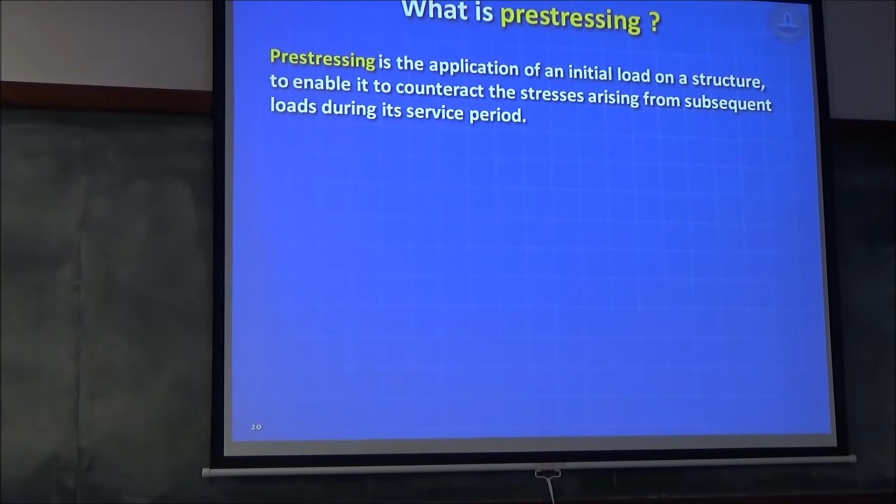So here's a very simple definition of pre-stressing. Pre-stressing is the application of an initial load on a structure or a system to enable it to counteract the stresses arising from subsequent loads during its service period, and to compensate for some deficiency in the material. As you rightly said, if concrete is weak in tension, so you can put it into pre-compression.

It's good, but sometimes we do the reverse. Sometimes materials are weak in compression and we subject it to pre-tension so that after you apply the load, you still have some residual tension left. Right? You don't want it to go into compression. Can you give an example of this?

Yeah, cycle spokes. Beautiful example. Can you explain? Spokes generally remain in tension. What's the diameter of a cycle spoke? 1.5 to 2 mm, not bad, very good.

And if you take it to the lab, and you know the length of the spoke, and you subject it to a load, what will happen to that spoke? You cannot take it, it will completely buckle. It will buckle. At what load will it buckle?

I want you to use your imagination. At what load will it buckle? You are afraid of units and all that, but I want you to give an answer. You guess the diameter, that means you're good in seeing distances, but you're not good in measuring weights. What load will make it buckle?

A 1.5 mm wire, that long. 1 kg? Let's get into structural mechanics. How do you find out? Eigen buckling load, Euler buckling load. So what's the Euler buckling load?

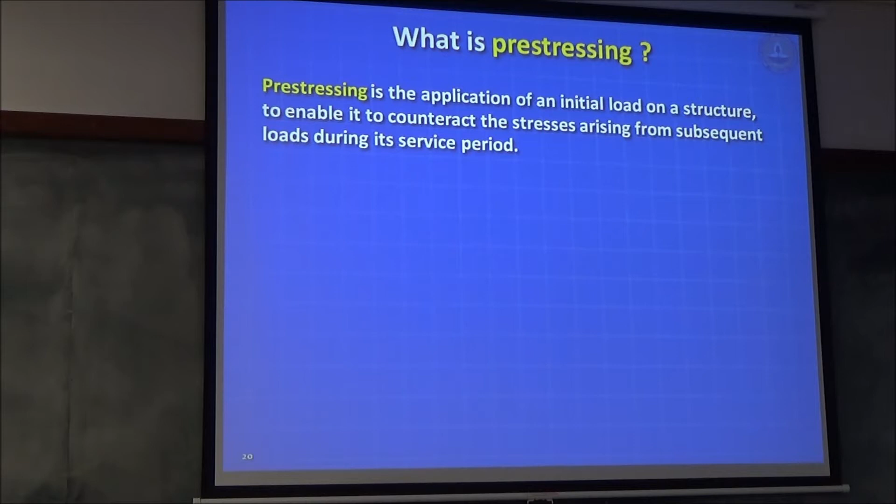Anyway, you can guess, you're putting weights and a tuck, it'll buckle. It'll buckle at a very low load. Just guess the load. Anybody? Around half a kg. Again, you go back to kg. The units of force are newtons.

Half kg force, okay? Because in his mind he already put and he knows, you've seen that half kg. Okay, that's a very low load. But in a cycle, how many people can sit on it and travel? Triples, 3-4 people, that's a heavy load. And the spoke which is touching will probably carry a large load, but it doesn't buckle. So how does the system work?

It shouldn't work, how does it work? It is so designed that all the spokes remain in a state of tension. How do you do that, practically? By tensioning all of them. How will you do it? By tightening at the center and also at the ring, and at least... Physically tell me. You only have the rim available, spokes available, you got to do it.

What's an easy way to do the job without pulling it? Do you want tension or do you want extension? These are beautiful words. By giving extension you can get tension, right? So that's probably an easier way to do it. What will you do?

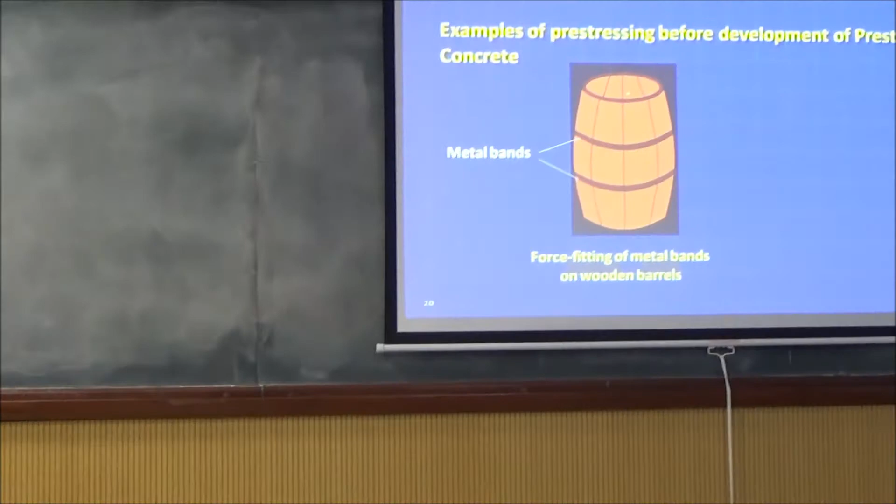So maybe there's some pictures, examples - this is the picture, very nice. You've got wooden barrels, you've got metal bands. Just tighten them, then no water will leak, no wine will leak. Simple example, right? By the way, read that book.

How many of you have heard of the French Revolution? It's one of the most powerful movements in world history, unlike any other. You have to have a taste of history - what's the use of being a structural engineer if you don't know history?

So read. What are the three famous principles that emerged from that revolution? Liberty, fraternity, equality. In French: Liberté, fraternité, égalité. Remember, these are very important principles, and many constitutions, including the Constitution of India, are based on these.

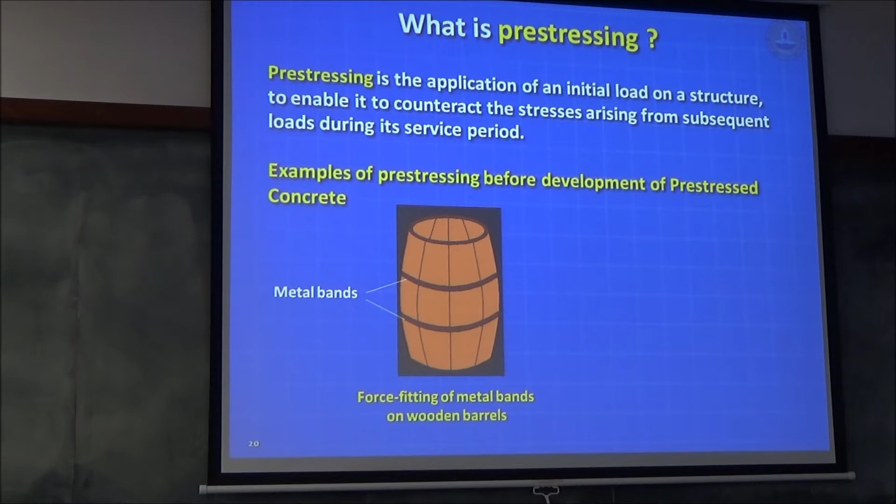The other example I just mentioned is pre-tensioning spokes in a bicycle. Now, concrete - if you read the history of concrete, we tend to give more emphasis to reinforced concrete than prestressed concrete. But historically, both started at the same time. Reinforced concrete took off faster than prestressed concrete. How old is reinforced concrete, prestressed concrete?

What's the first concrete structure ever made? 1850, there was a boat. How old is cement, I mean manufactured cement? Which century at least? 18th.

Why is it called Portland cement? There was a village in UK called Portland, and the stone there had the same greyish color as the cement. But you had pozzolanic cement way back in the Roman period, so manufactured cement came at that time. The first known application is actually a kind of ferrocement boat. Soon after that, people tried making beams. Today we don't remember that history, but it's very interesting - they realized that bond happens, that steel can take tension.

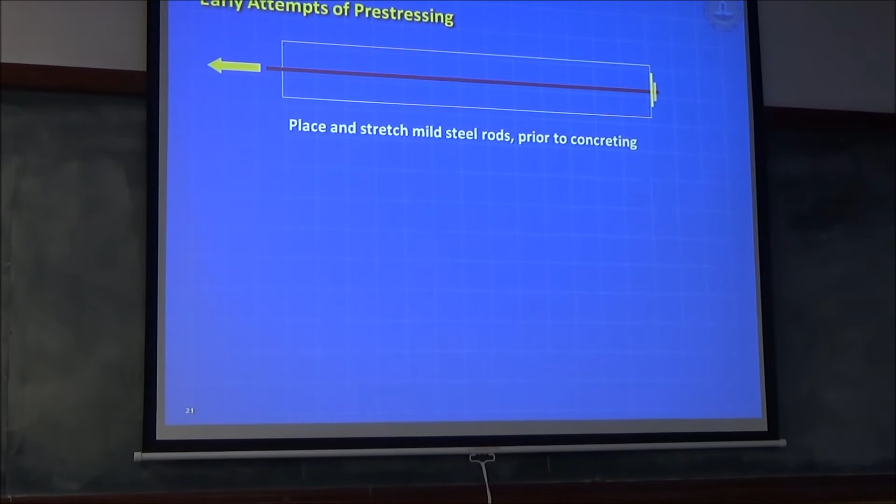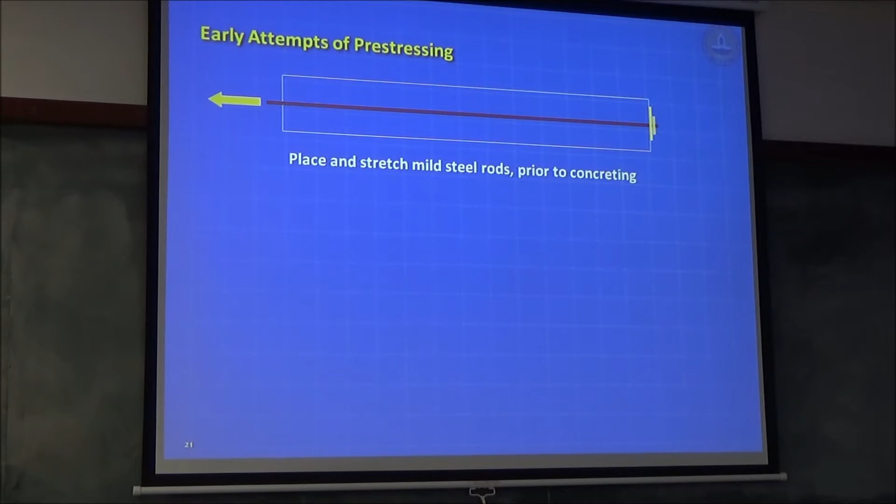They actually did what is called pre-tensioning. They pulled the bar - those days the bars available were only mild steel bars. They pulled it and then concreted the beam. It was kind of M15 concrete those days - mild steel and M15 concrete, that's all. And once cast, they put loads on it. I think the earliest loads they put were flower pots and things like that.

Then something happened - it worked. Everybody celebrated. But their celebration didn't last too long. Why?

So you release the tension - just like you pull it, you release the tension, and what happens is the bar wants to go back, shrink back to its original length, but it cannot because the concrete has hardened and it's bonded, so it ends up applying compression in the concrete. So is there an axial force in the beam? Yes or no? Yes.

If I say no also, I'm correct. There is no axial force in the beam - the beam doesn't become a column now. Why do I say that? No external load. There's no net axial force in the beam. Why? Because if I cut a section anywhere, there's no externally applied load, so there's no net force.

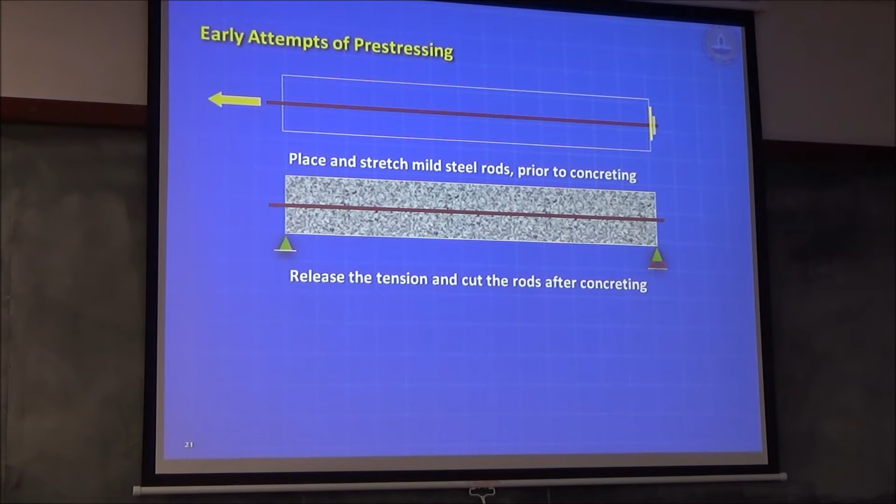But this didn't work. Although these beams could support load successfully initially, they started deflecting and cracking after some time, and eventually collapsed. This is what we call failure, and that failure was very useful to learn, because once you know a problem, once you can diagnose a problem, then you can find a solution. So why do you think this happened?

Losses. So the prestress got lost. But it didn't happen suddenly - it took a little time and it got lost. What happened?

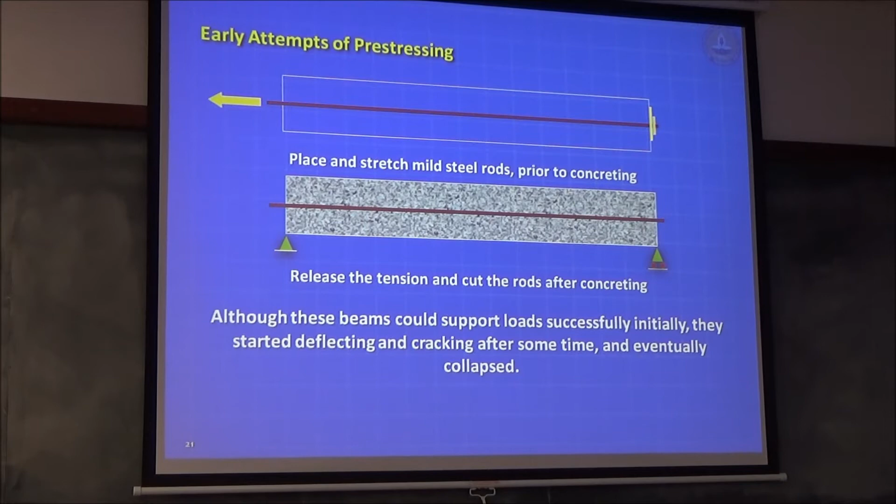Steel is relaxed? No, that's not the answer. I mean, you are remembering what kind of losses - you know that one of the losses is relaxation of steel, but that's not the reason. Want to produce some heat, can expand the steel? You have to learn civil engineering, not mechanical.

Mild steel will yield at a low level. Obviously, then this prestressing operation would have been unsuccessful, because the guy pulling it would be going on infinitely. You have to be careful - you should prestress it with some margin within the elastic limit.

Otherwise you lose it. Maybe you can go up to the elastic limit and then only release it, because you lose something from what is called elastic shortening, as the concrete gets compressed. Remember yesterday we said EA by L, because A is the net area of the concrete. That happens and you lose a little bit there itself.

That's called immediate loss. But there is something that's happening over time - molecules of the mild steel are trying to de-stress themselves and they will try to elongate, trying to take out the stress. Two words: creep and shrinkage.

What is creep? I'm a layman - I've heard this word creep, it gives me a shiver when I hear creep, creepy guy. Don't tell me 'strain on' and all that - what is creep in any material? Time-dependent accumulation of strain under a constant load.

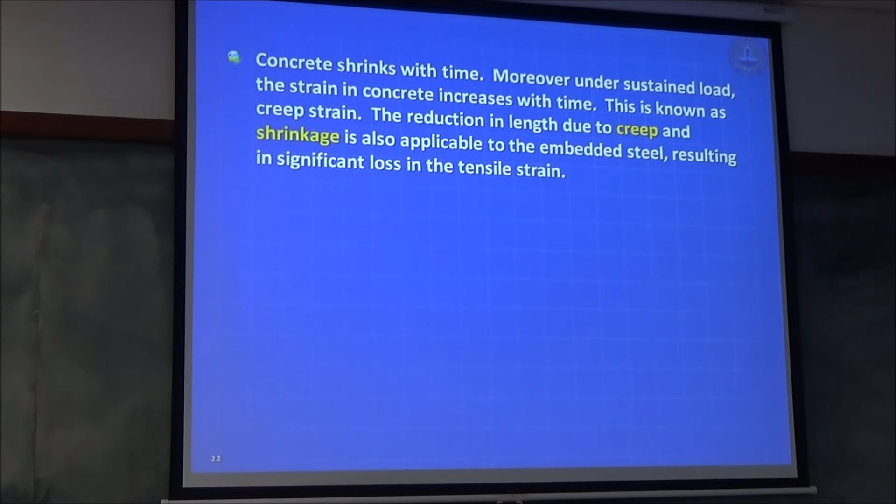Moreover, under sustained load, the strain in concrete increases with time. This is known as creep strain. The reduction in length due to creep and shrinkage is also applicable to the embedded steel, resulting in significant loss in the tensile strain.

In the early applications, the strength of the mild steel and the strain during prestressing were low or less. The residual strain, and hence the residual prestress, was only about 10% of the initial value. You understand? 100%, and then what you are left with is 10. 10 is very little to take any load. This is approximate.

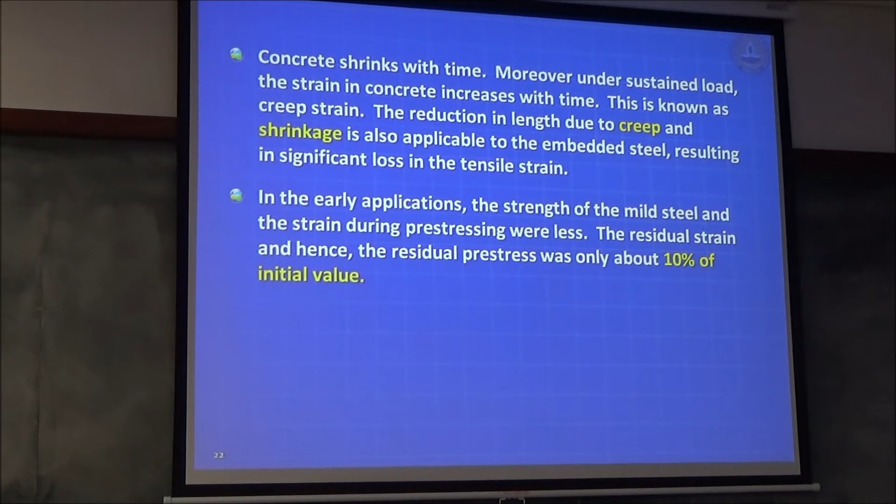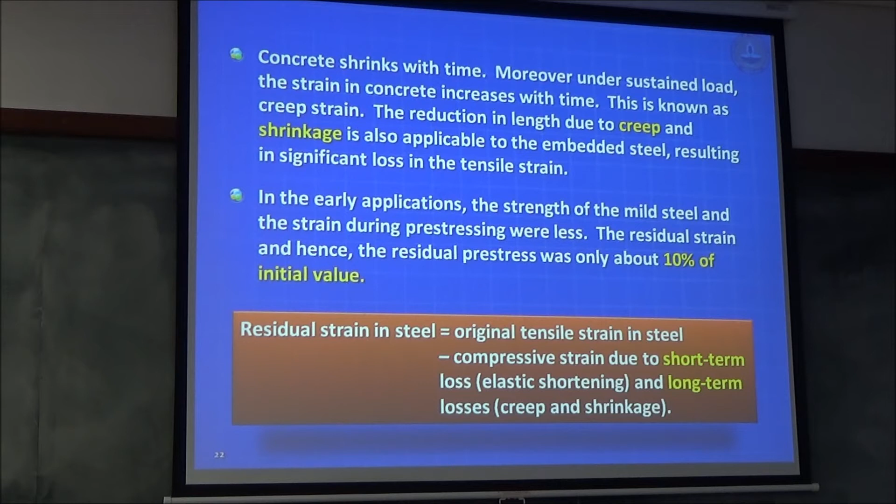So residual strain in steel is equal to the original tensile strain in steel minus the compressive strain due to the short-term loss - I told you, EA by L, the elastic shortening - minus the long-term loss of creep and shrinkage. They figured this out very quickly. Now we are engineers, let's do some quick rough calculations to show this. So to save time, I'll give you the calculation. The maximum original tensile strain in mild steel is the allowable stress - well, they also followed allowable stress. What's the yield strength of mild steel?

Around 250 megapascals. In the working stress method, they used to allow you to stretch up to 130, 140 megapascals. So let's take 140 and divide by the elastic modulus, and then you get strain. So you've stretched your steel initially by this much. You must be good with these numbers.

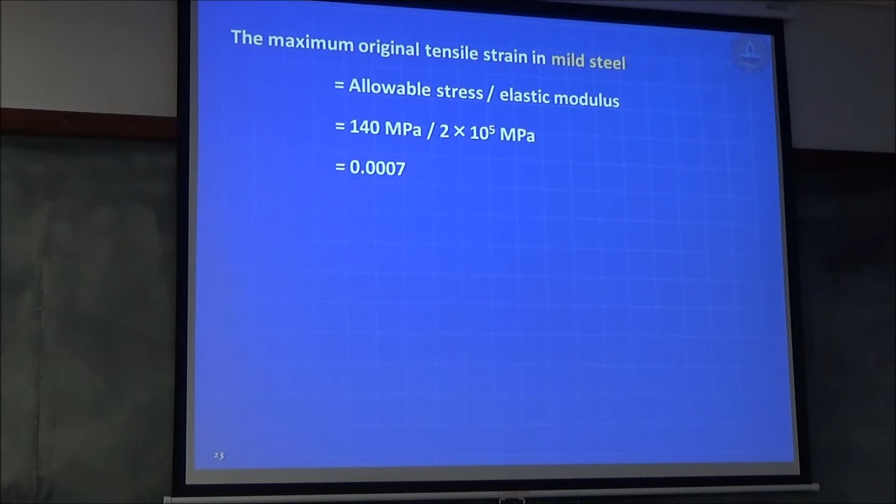You could be asked an exam question where you have to figure it out yourself. Now, if this is lost, it's lost. So what happens is, the total loss in strain due to elastic shortening, creep and shrinkage was also close to this, maybe just 10% less. And thus there was no significant residual strain for prestress.

Now the next question to ask is, we need to change this. Imagine you invented prestressed concrete. Is it difficult to imagine? And this happened in front of you, and you figured out these answers. Now how do you solve the problem? What's the solution?

Again, we have to go to France. Who's supposed to be the father of prestress? Eugene Freyssinet. But the solution, I think, was found before him. Can you tell me what the solution is?

What's the, how do you do it? Going slow, no problem. It's interesting, no? What's the use of rushing and finishing the whole syllabus? Go slow. But my people are looking at me because I'm supposed to cover so many slides per lecture, but I'm not able to do it. Tell me, initial classes will be slow. Agreed? But I want you to think on your feet. Give me an answer.

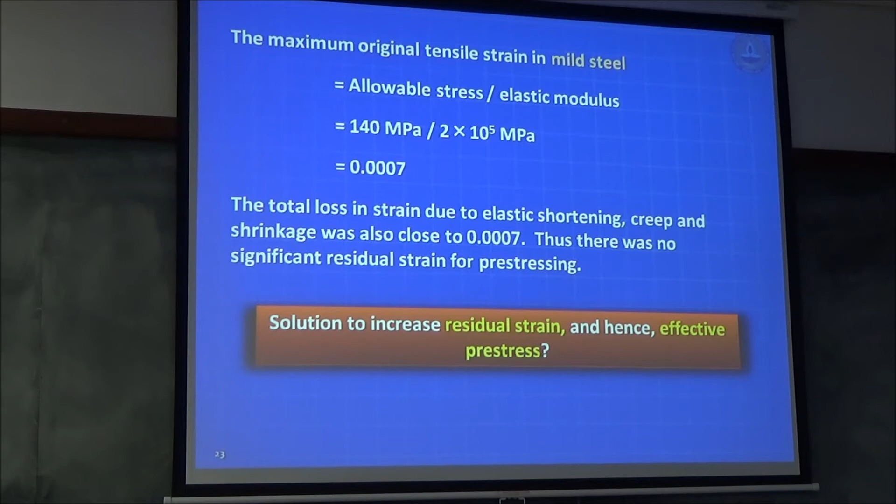Beautiful answer. Mild steel, this is all you can do. You can stretch that 140 to about 200. That's all. That's not good enough. So there's only one way. If you want to use steel, you have to have a steel which you can pull more. Obviously.

What is the ultimate strength of prestressing steel available today? UTS we call it, and yield is pretty close to that, 90% of that. Mild steel, 250. High yield strength deformed bars for reinforced concrete is, well, today 500. Double of 250. Even that's not good enough. Can you guess what's the ultimate tensile strength of the steel used in prestressing? Close to 2000. 1860 is what? 2000. That's really great.

250 became 500, 500 has become 2000. Then you can pull quite a lot and let it shrink by 0.0007, who cares? You still are left with, your bank balance is still high, you've not lost it. That's the answer. Adopt a high strength steel with much higher initial strain. This also generates high pre-stressing.

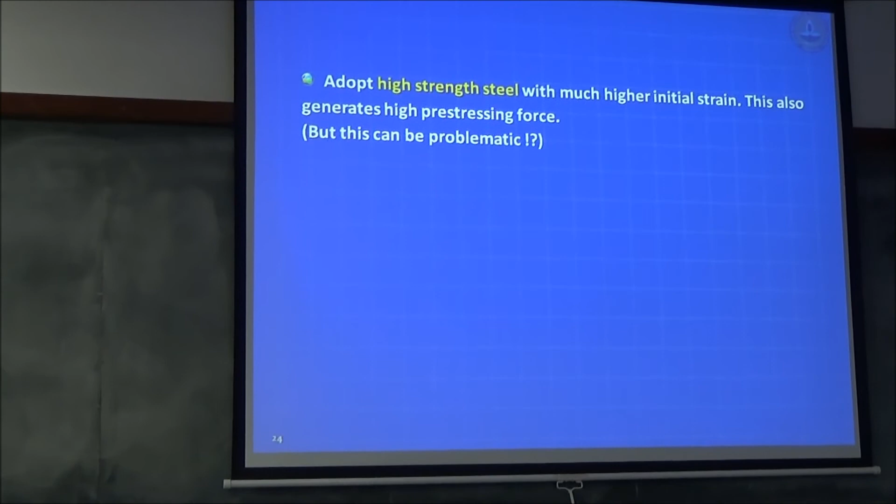But when you pull it a lot and you release it, then there's a problem, a new problem will emerge. What is the new problem? Bond you can always have. We will not get the same strength of bond. Wait, we cannot get same bond strength from the...

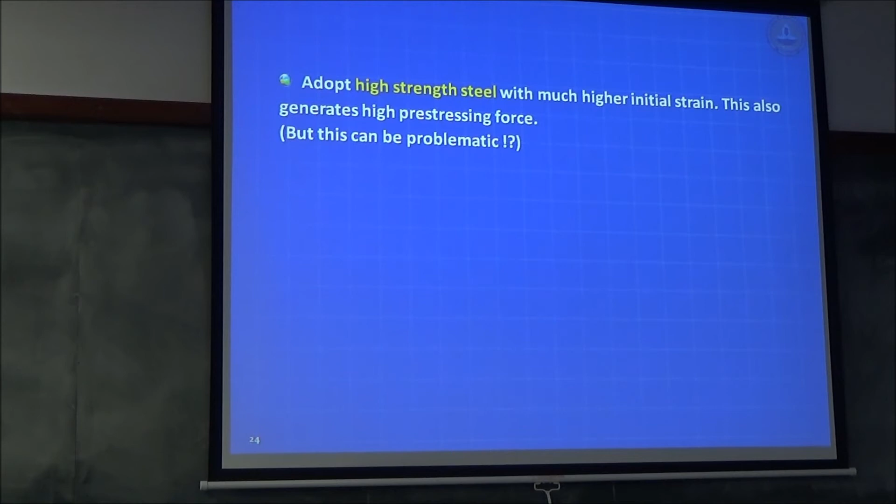You will get it. By the way, we have pre-tensioning and post-tensioning. We'll see that soon. Okay, we'll postpone that question. Bond won't be an issue. You can even have unbonded in post-tensioning. That's a separate issue. But there's another big problem.

This is the problem again. How? What's the problem? Most stresses might be created in concrete. What do you mean might be? There's no might be. Equilibrium has to be satisfied. You are pulling this a lot, you got a huge... See, the modulus of elasticity doesn't change whether you use mild steel or high strength steel.

Compressive strength of concrete. Wait. So if the strain is increased multifold, the stress will also be increased, I mean both ways. You got 2000, then that force into the cross-sectional area is the tension. That tension has to be equilibrated by pre-compression in the concrete. And with normal grade concrete, you'll run into trouble, it will crush.

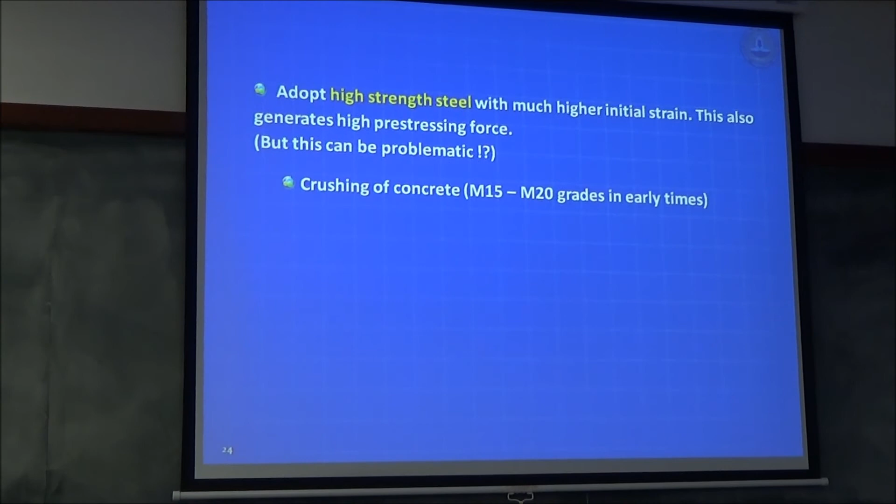So what's the only solution left now? You have to also increase the grade of concrete. So historically, this is exactly what happened. Earlier they had only low grade. They were forced to get into it, so if you use high strength steel, you also have to match it with high strength concrete. Adopt high strength concrete. Clear?

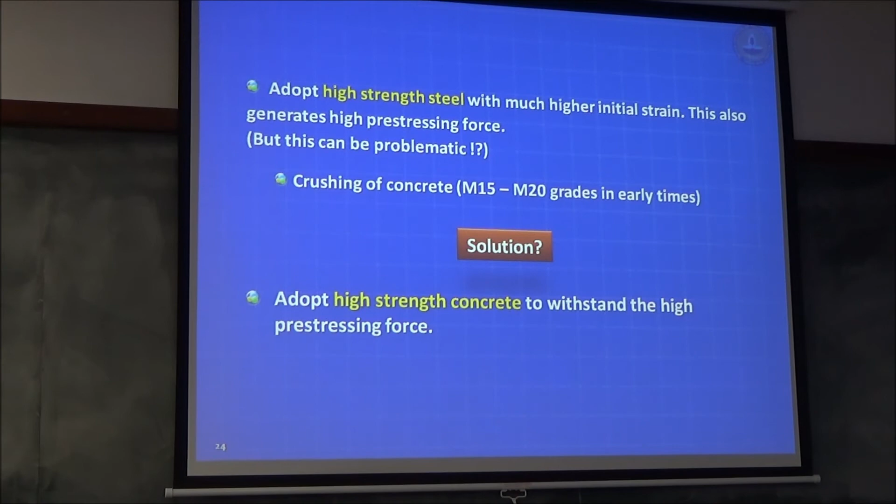So we've kind of gone through history in a few minutes and figured out what to do, and you got the answers yourself. Good. Now before we get further into the subject, take a look at something that is available in the lab, in your experimental course. You have a course on experimental testing, right? All this will be shown to you.

But you have two categories. This is called reinforcing steel or rebar. Rebar is a short form nowadays used, of different diameters. And this is the material used for pre-stressing. It looks similar, but it is much higher strength than this. And it can come as a wire.

It can come as strands. These three are strands - wires put together and twined around so that you could get, ideally say 7, or a larger number. Or you could get a solid bar. These are the three typical things. But they have high strength and you can pull them and stretch them. Clear?

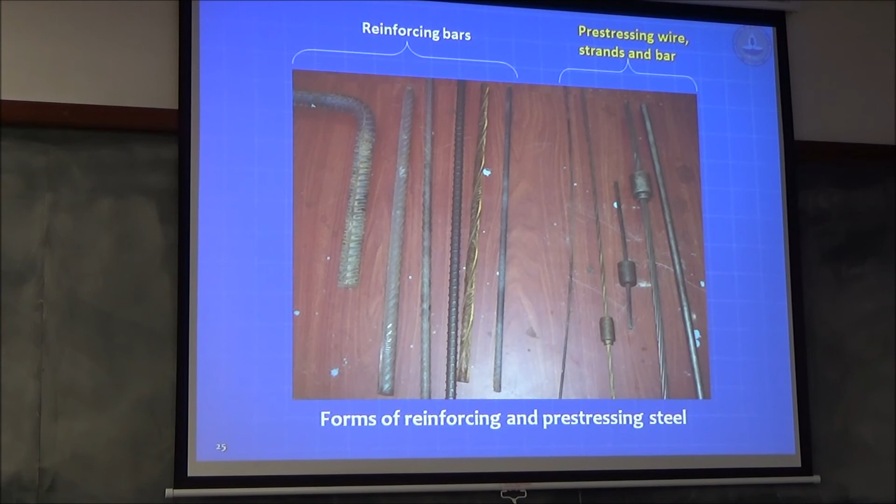The forms of pre-stressing are given in your code. So we have a code for pre-stressing. Did I mention this? IS 1343.

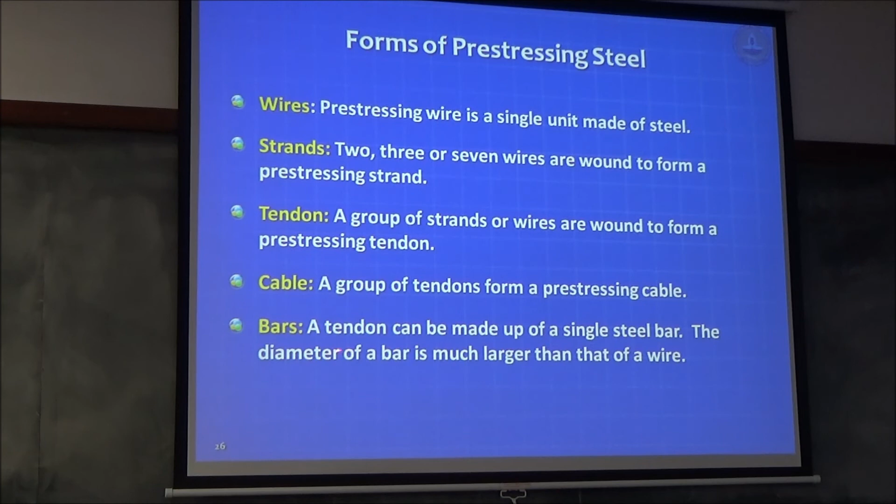The diameter of a bar is much higher than that of a wire. So this is a 7-wire monostrand tendon. You can see how neatly it is - the cross section is closely packed, 6 on the outside, 1 inside. This one is straight and the others are twined around it.

And then there is an anchorage, we'll study that. So there's a multi-strand tendon. Then you can have multi-wire, you can have single bar tendon, and so on and so forth.

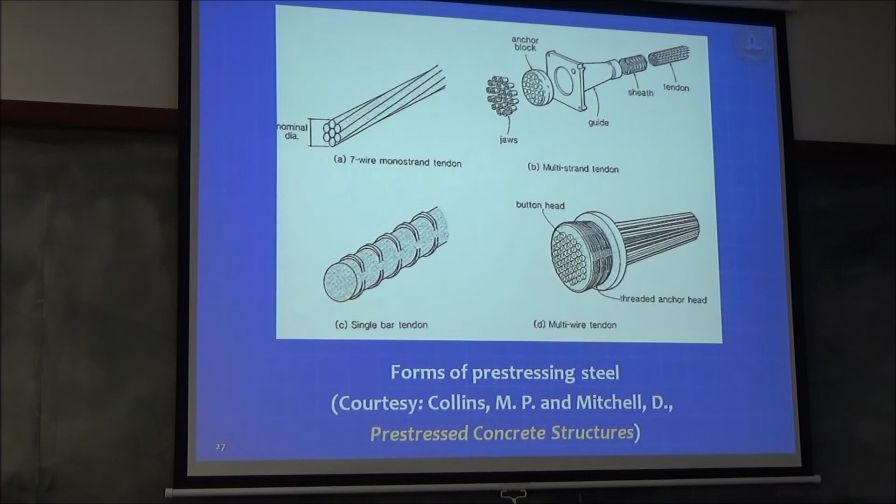Next question. Prestressed concrete with embedded steel can be either pre-tensioned or post-tensioned. PSC is what we say for prestressed concrete. What is the difference between pre-tensioning and post-tensioning?

Pre-tensioning also - first tension. The objective of both is to achieve the same goal. We are not actually interested in pulling the steel; our objective is to put the concrete into a state of pre-compression so that it can counteract the tension that develops later under load. Is it clear? There are other forms of pre-stressing other than using steel, such as chemical pre-stressing, though these are not so common.

So if you're using steel, there are two ways of doing it: pre-tensioning and post-tensioning. You have to be careful with this word because pretension has another meaning. It's pre-tensioning, and often they may not use the hyphen between pre and tensioning, but when you speak, don't say pretension - say pre-tensioning and post-tensioning. Pre means before, post means after. Before what and after what?